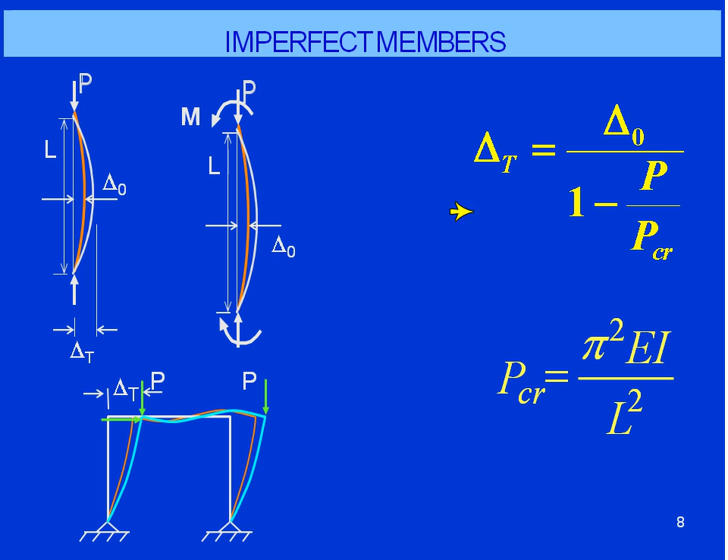In all these instances, this formula will give an accurate indication of what the displacement is after you apply some axial load. We sometimes call this term an amplification factor - you take an initial displacement, and as you apply axial load, the displacement increases. This is a really important concept in stability, because it says that as the load P approaches the theoretical buckling load, the deflections will go to infinity. That means there will be plenty of warning prior to an impending problem.

In fact, what this graph shows is that the Euler load, which is up at this level, is really never reached, because we're going to start to get some yielding due to the second order effects generated by the P-delta moment. In this case, it's located right here at about 85% of the Euler load.

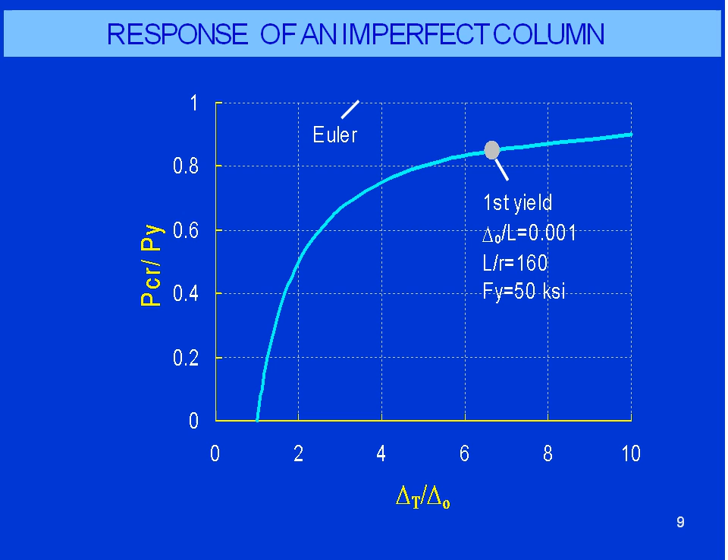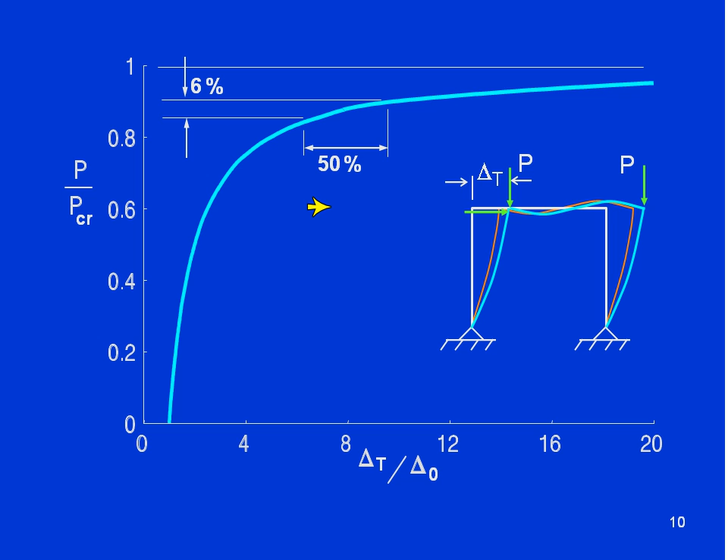Now, a very small increase in load as you get close to the buckling load has a very significant change in deflection. In this frame, if we're at this level, a 6% increase in the load, going from about 0.85 to 0.9, will increase the deflection about 50%. That means when you are getting close to any instability in a frame structure, there should be ample warning that impending disaster is about to occur.

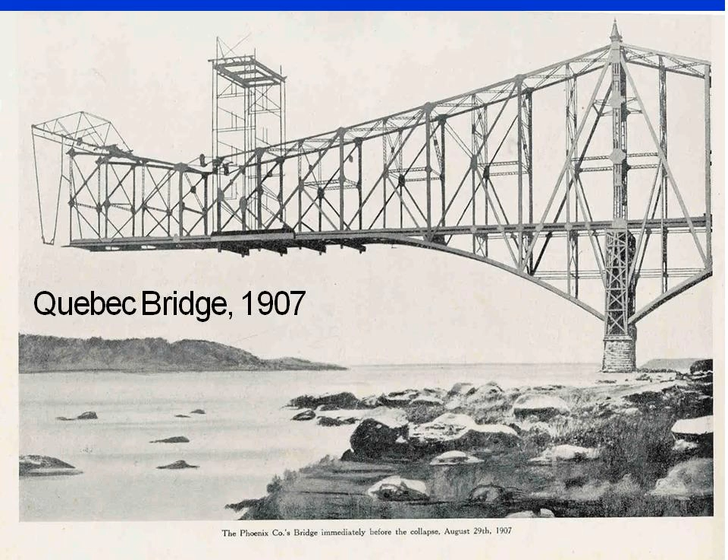I'm going to read some quotes from a magazine article by Tarkov, referenced in the PDF file. This is what happened to the bridge. On August 6, McClure reported to the bridge designer, Cooper, that the lower chords of the south cantilever arm were bent. Cooper was troubled - he wired back with the almost plaintive question, 'How did bend occur in both chords?' Chief Engineer Deans insisted that the member had already been bent when they left the shop.

This is a typical situation in which fabrication and construction now start arguing as to what really happened. McClure insisted that they only began to show deflection after being installed on the bridge. The debate over the chords occupied the greater part of August. Meanwhile, work continued and the stresses on the lower chords grew.

Two weeks later, three other chords showed distortion. The bridge was collapsing with glacial slowness, but no one, not even Cooper, appreciated fully what was happening. After another week passed, the crisis should have been obvious to all. A week before, chord 9 of the south anchor arm had been only three-quarters of an inch out of line. Now the deflection was two and a quarter inches.

McClure wrote to Cooper immediately. After Cooper read the letter, two days later he sent a terse telegram to Phoenixville that read: add no more load to the bridge till after due consideration of facts. I will be over at 5 o'clock.

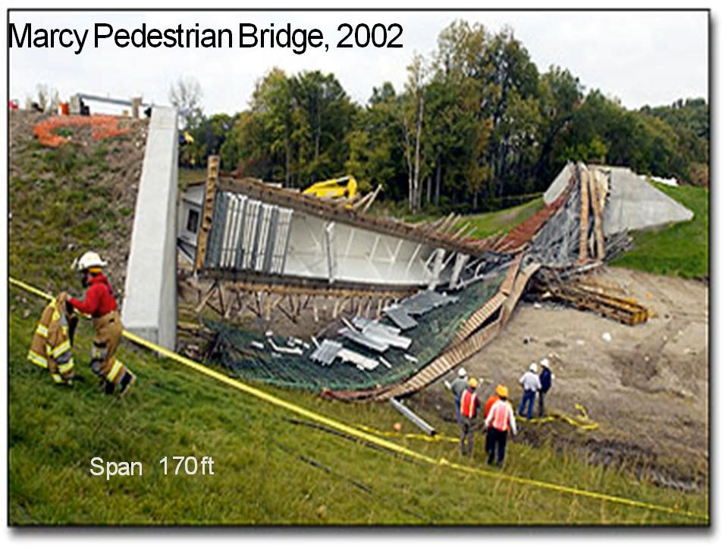The little frame cannot sway, so we would call it a braced frame. You could read papers or do analysis which suggests that for a frame like this, you might be able to use K factors less than 1. In this case, it would calculate out to 0.84. So perhaps you think you can put on a load equivalent to about 40% higher than the Euler load.

I'm going to define an M sub O, which is just WL squared over 8, the simply supported beam concept. There is a moment connection up at the top, so the gravity load on the beam is causing some moments. The distribution shown here would be a distribution we would typically get from a first order, normal structural analysis. There's a moment at the joint, there's a moment in the beam, and there's a maximum moment in the column, which at this stage is shown at the end.

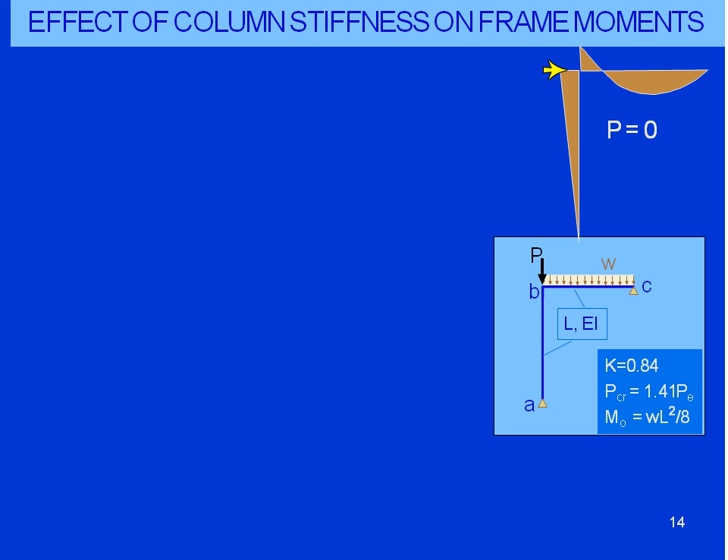This curve is the maximum moment near the midspan of the beam. If we just follow it, we can see that as I apply axial load, the maximum moment in the middle of the beam increases. As a matter of fact, when the axial load reaches the Euler load, pi squared EI over L squared, the maximum moment in that beam is 1/8 WL squared. In a problem like this, many engineers probably would even just design the beam to carry 1/8 WL squared and not actually take advantage of the restraint they thought was available at the end.

The moment at location B, which is at the top of the column, starts off at about half of 1/8 WL squared, but it reduces as the axial load increases, and in fact reaches zero at the Euler load. What has happened is the inflection point, which was maybe at about the quarter point in the beam, has shifted as axial load occurs, and at Euler load the inflection point is right at the top of the column, and the moment is 0.

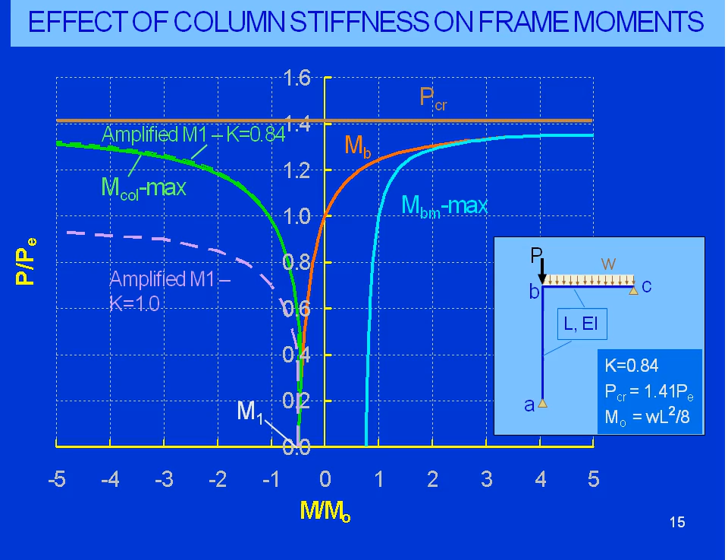We're going to look at this more carefully with regard to a moment diagram, which shows how the stiffness is reduced in the column, and what that does is change the moment distribution within the column.

This is for P equals 0. When we're halfway up to the Euler load in the column, in all these cases the load on the beam has been held constant. We can see that the inflection point has shifted, and the shape of the moment diagram in the column is changing from linear to some curvature.

At the Euler load, we actually appear to have a pinned end in spite of the fact that we have a moment connection up there - the moment is 0. Then as I attempt to put on higher axial load, in this case 10% above the Euler load, the inflection point is actually moved within the beam, if the beam has the capacity to support this. Usually it would not, so a plastic hinge would form in the middle, and we really could not get a value above Euler.

So papers are published that suggest you could take advantage of the restraint that a beam provides to produce K-factors less than 1, but in a frame structure where the beams are carrying load, that's just not going to happen because the beams have not been designed for the amplified moment - notice about a 50% increase in moment - to support a load higher than the Euler load. Now in truss-type structures where there is no load on the beams between the ends, K-factors less than 1 are a possibility, but not in a frame structure.

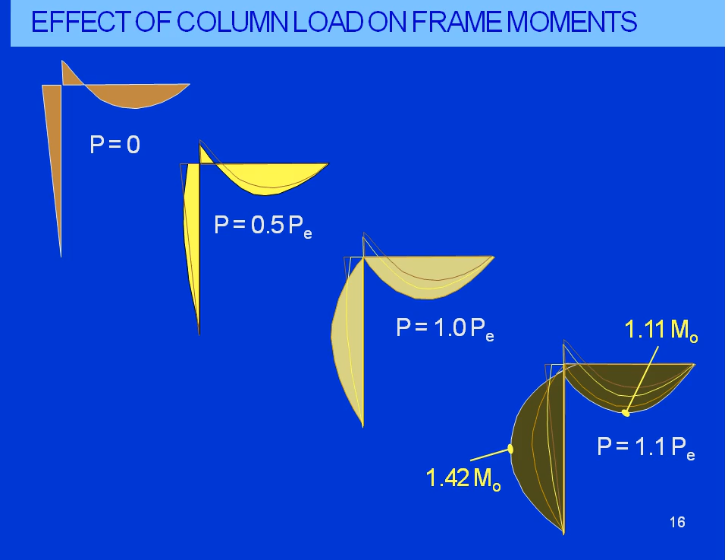Now we're going to shift to the second concept, which is understanding and taking advantage of inelastic column behavior.

Again, we're going to look at imperfect columns. I'm going to look at the first yield stress of P over A plus MC over I. In an imperfect column, the moment will be equal to P times delta total given by the formula we discussed in the first portion.

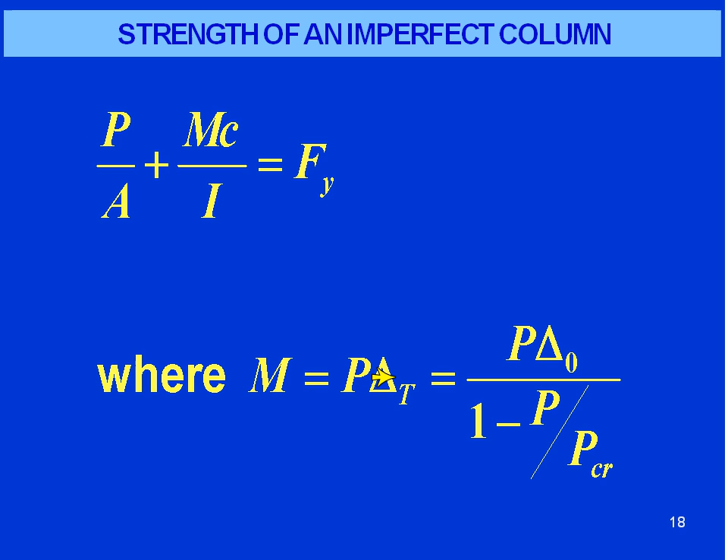Now, a plot of P with different L over R's for first yielding using just P over A plus MC over I produces this solid line. If I choose an initial imperfection of 1 in 1,000, and our cross-section has a span to depth ratio of 20, and in this case I'm dealing with yield point of 50, just plugging in the classic strength of materials equation, you get a curve that looks very much like the column curve, shown dashed in this case.

In the low load or slenderness region, the formula does a pretty good job. In the shorter region or high stress level region, that formula overestimates the capacity of the column. Generally, if you take P over A plus MC over I, and you have that reach yield, you are very close to the maximum load that a compression member can carry. In this case, that would estimate the capacity.

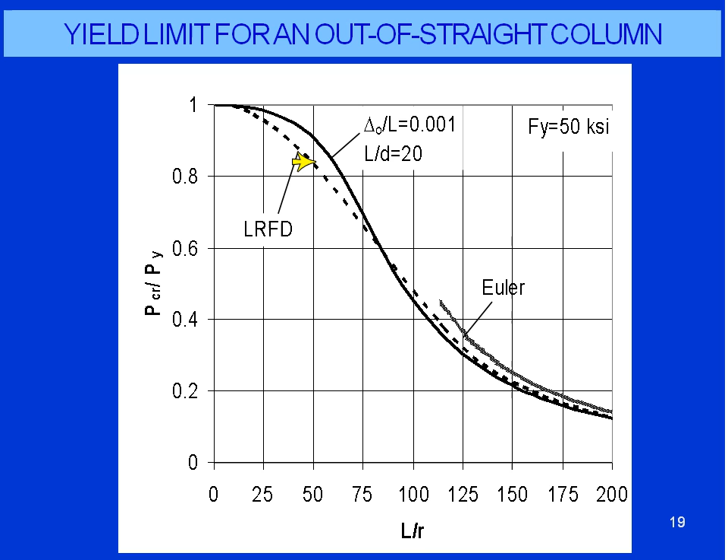There's less capacity by the current spec, and that's because of the presence of residual stresses. When you buy a rolled section, there are already stresses in it, like it or not, and that's due to differential cooling during the manufacturing process.

The concept of residual stresses is usually explained by a series of pictures like this. This might be a residual stress distribution, which shows compression at the top, the tips, and then tension stresses near the junction of the web and the flange.

There are many distributions. When I now take a P over A applied stress, those stresses are superimposed on the existing residual stresses to produce a stress distribution that varies over the cross-section. In this particular case, it's shown that the tips have already yielded, but the junction near the web - the average applied stress - is not at yield yet, but because of the presence of residual stresses, some portions have yielded.

Now, we know from the stress-strain curve that when portions of the steel are in the yield zone, there is no stiffness. That is, E is not 29,000, but E is 0. That's illustrated by the yellow portions of the cross-section. The green portions are still elastic.

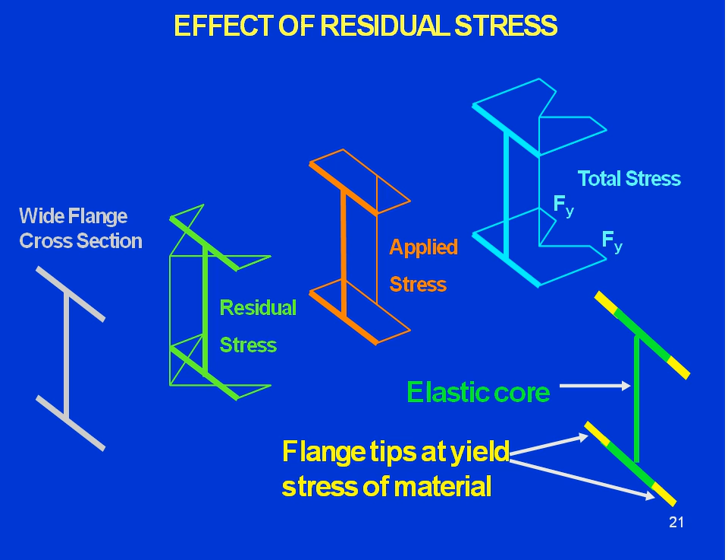Now, this concept, so what? We use the column curve, and yeah, that seems to make sense. But to look at this further, we'll have some practical significance. Also, that concept that there are portions of my cross-section that are useless as far as stiffness is concerned is a little bit hard to swallow. So we're going to do an experiment here.

We have a cross-section. The green portion has been manufactured using high-strength steel with a proportional limit about 70 KSI. We've epoxied two pieces of low-strength steel that have a yield point of about 40 KSI. These are the stress-strain curves that were measured.

Now, in the low stress range on the cross-section, both of these pieces are elastic, and the modulus is 29,000 for the entire cross-section. But if I get stresses on that cross-section that are higher, then the brown portions will in fact be yielded, and that means that as far as stiffness is concerned, they contribute nothing if the structure wants to deflect, or in fact we call that buckling.

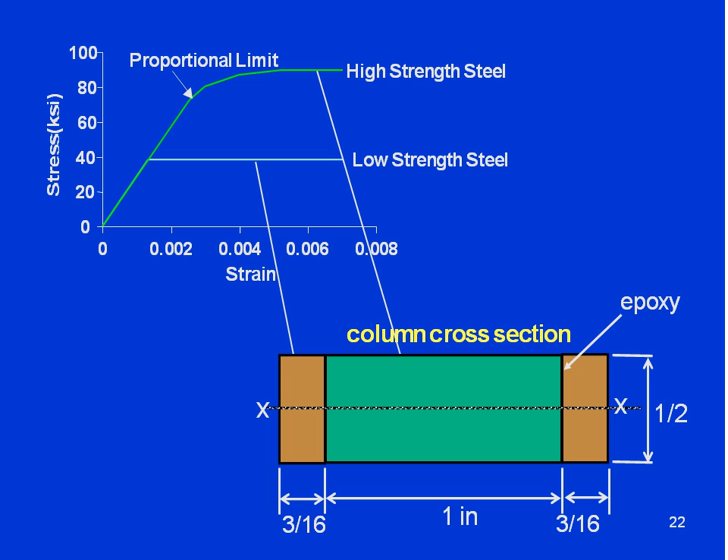So we did a test on these. We tested the cross-section that's just the center portion by itself, and we tested this built-up section made up of two materials. But the buckling is going to occur about the weak axis, so the area that's added here in fact adds directly to the moment of inertia. In this case, the moment of inertia is 38% bigger for this cross-section than this one, if in fact all the portions of the cross-section contribute to stiffness.

So when we tested a long member that would be expected to buckle at stresses lower than 40 KSI, this member carried 38% or 40% higher load than this one, as we would expect.

But when we tested a shorter one, it permitted higher load or higher stresses. At those higher stresses, the brown portions have yielded. And the experimental test load for both this cross-section and this one gave exactly the same load when the length was short.

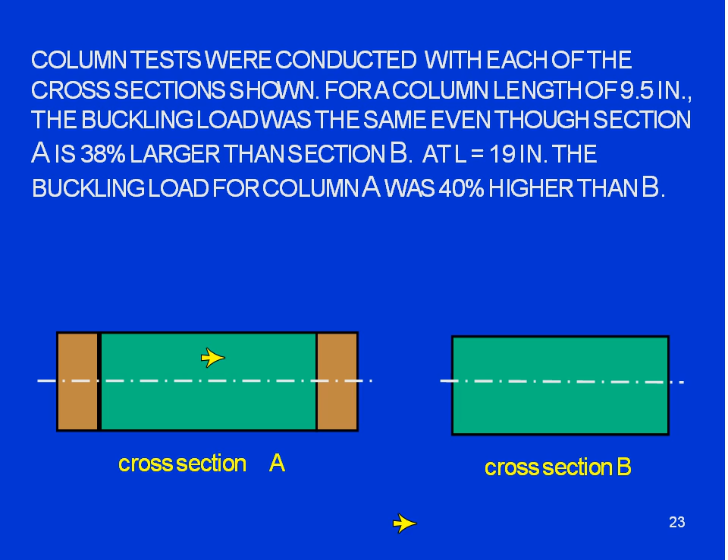Any yielded portion of a steel column contributes nothing to the buckling strength of that member, even though the entire cross-section supports the load.

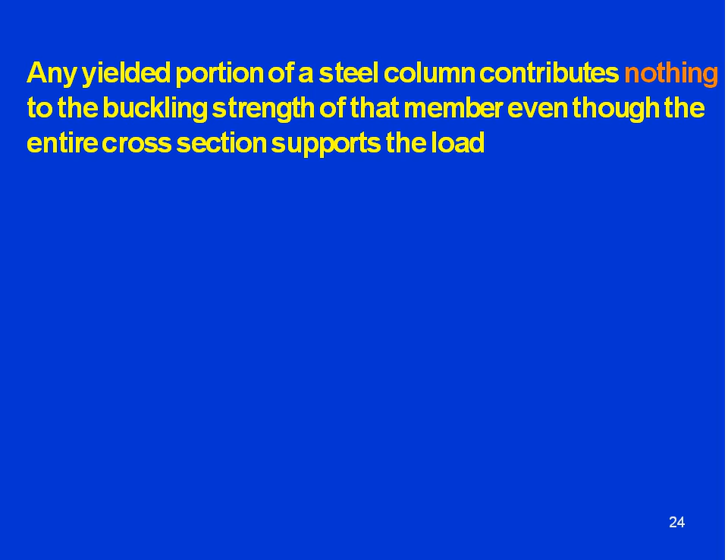Now we're going to utilize that concept by looking at the column curve compared to the Euler curve and try to understand inelastic behavior a little better. We have a tendency to think that the elastic range of column behavior is the high slenderness area, and the low slenderness area is inelastic. The low slenderness area we sometimes call the inelastic range, but actually that's not a good way to look at the problem. Inelasticity is caused only by load, not how big the cross-section is.

If I have a big cross-section with a small load, the cross-section is elastic and it's very stiff. It's only when I exceed, by the AISC column curve with P factors, a P over the yield load—this is the squash load—of 0.35, will I start introducing inelastic concepts. That is, the Euler curve and our current column curve do not line up, whereas they do line up when we have stresses below 0.35.

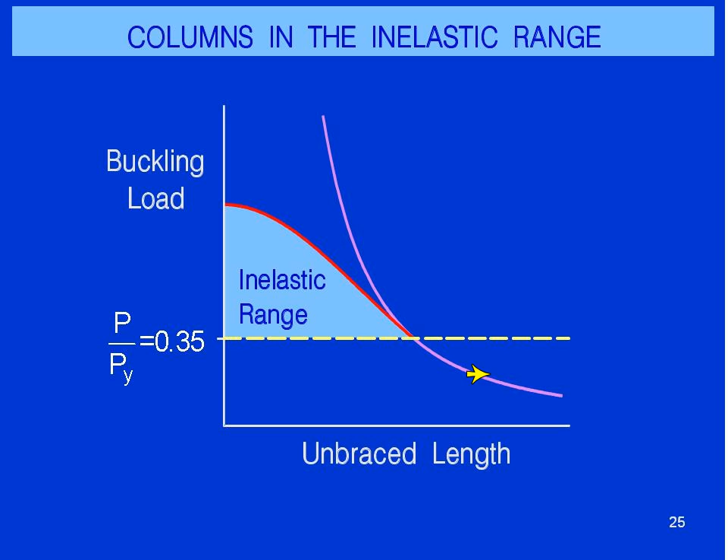Now we're going to use this idea because I like Euler. I'm going to look at this column curve and say, if I took the ratio of our current column curve to what Euler would say we would carry, of course, in the inelastic range, there's a difference.

There's a reduction, and we're going to call this a stiffness reduction factor, tau. Mathematically, that's equivalent to what we call the tangent modulus over the elastic modulus, but it's just as easy to visualize it as the ratio of these two points. What this says is the cross-section is losing stiffness. It's not 29,000 anymore, it's effectively something less.

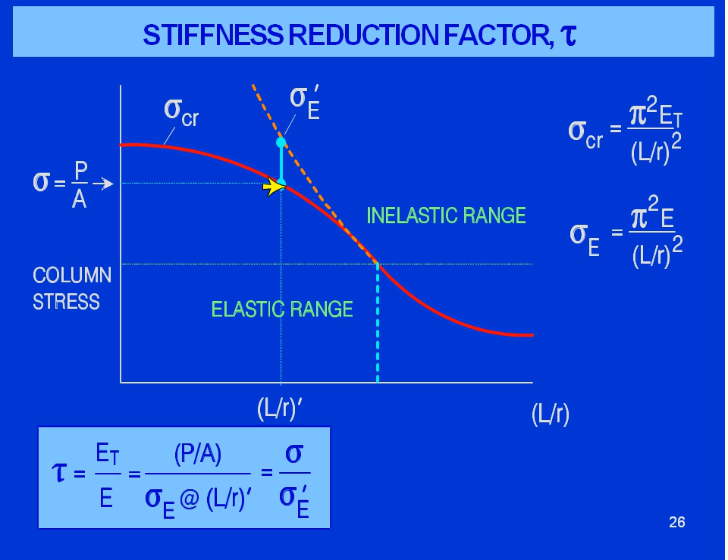I'm going to introduce you to a little bit different way of looking at column design by utilizing that tau factor, and I'm going to illustrate it just with a simple column design first. This is the current method in the AISC specification. There are two formulas, the Euler type, reduced by 0.877, and then what we call the inelastic type.

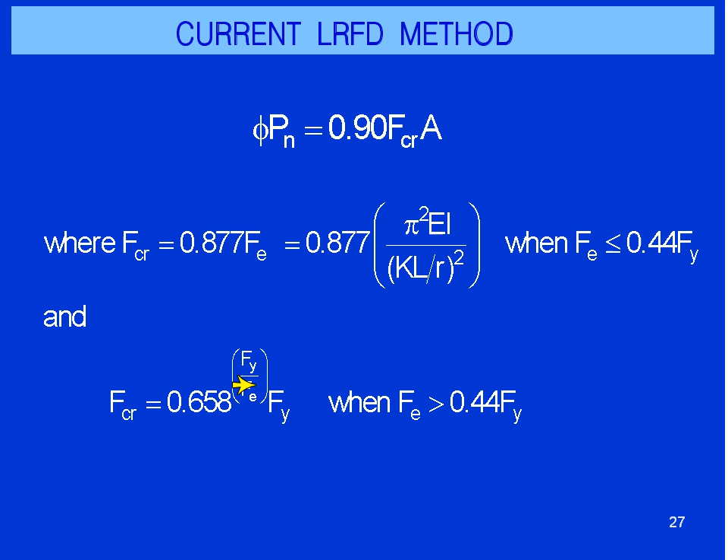Now I'm going to introduce something that's equivalent. I like that Euler equation, and I'm going to put in the phi factor of 0.9, and then this is just the Euler equation, but I'm going to put in a tau. I'm going to take that AISC equation, divide it by the Euler equation, and come up with a new formula.

It's this one here. Now, it's 1 if the load divided by the squash load is less than 0.35, because that means the cross-section has low stresses and it's elastic. If my axial load is higher than 0.35, I'll plug into this formula, and it will tell me how much my stiffness has been reduced.

Now, this times pi squared times E is 226,000 times the moment of inertia divided by L times tau. This is the column stiffness formula.

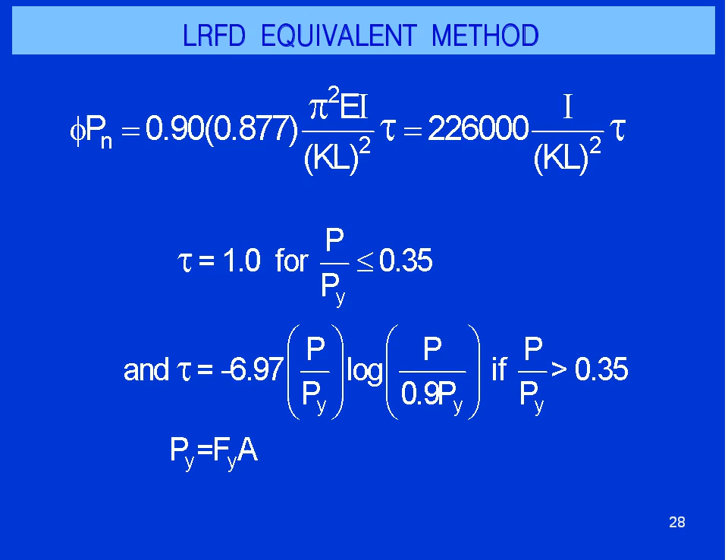I'm just going to do a little column design. I'm going to take a column that has a load on it of 1,030 kips, and it has got a length of 20 feet. It's pinned end at both ends. And what column size is required?

Well, of course, if you have an AISC manual handy, what you will do is just enter the column tables with a length of 20 and that particular load, and you would find, if it's a W12 section, that a W12 by 120 will work. Now, that's the easy way, but I want to introduce you to this new way of looking at it because that's going to be important for some other examples I'm going to show.

Using this newer idea, I'm going to first calculate. It's always a good idea to know how much load you have on there compared to the yield load, and in this case, I'm going to try this column. It says that with this load of 1030 on here, my P over Py is 0.584, which is greater than 0.35, and when I plug into that

stiffness reduction factor, which, by the way, is published in a table in the 13th edition manual. The new manual has a slightly different formula, but I won't get into that. What this says is the tau comes out to be 0.764, which is saying that with a load of 1,030 kips, there's some inelasticity on that cross-section which reduces its stiffness by almost 25%.

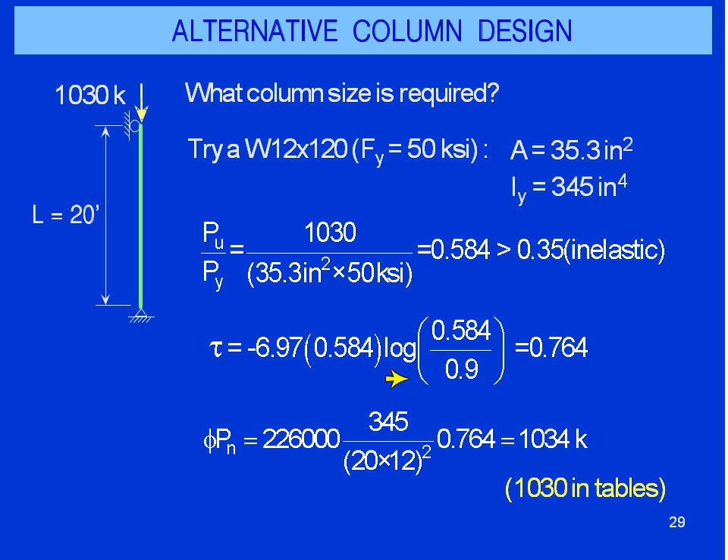Now, for this problem, you wouldn't apply this approach because it's easier to use the column table. But that concept is going to be useful in this next concept, which is called the summation of P concept for system buckling. Everything we've done up until this point has been for an individual member. Now we're going to look at systems, more than one member.

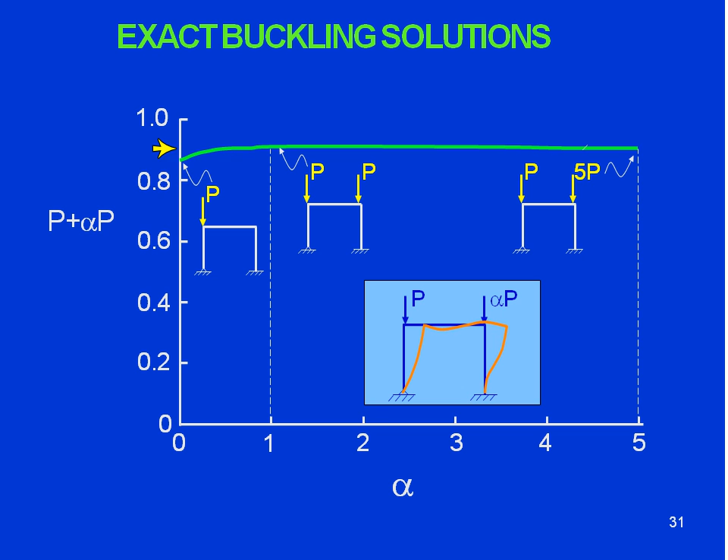Now we're going to look at a couple of examples here, one of which is going to be elastic.

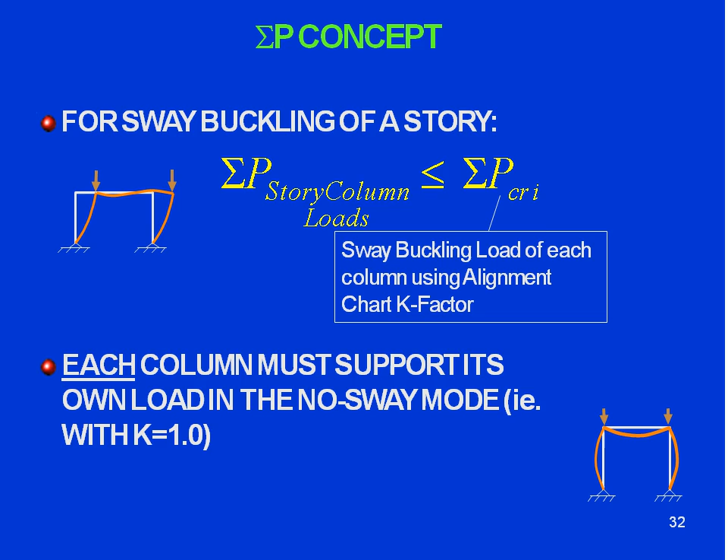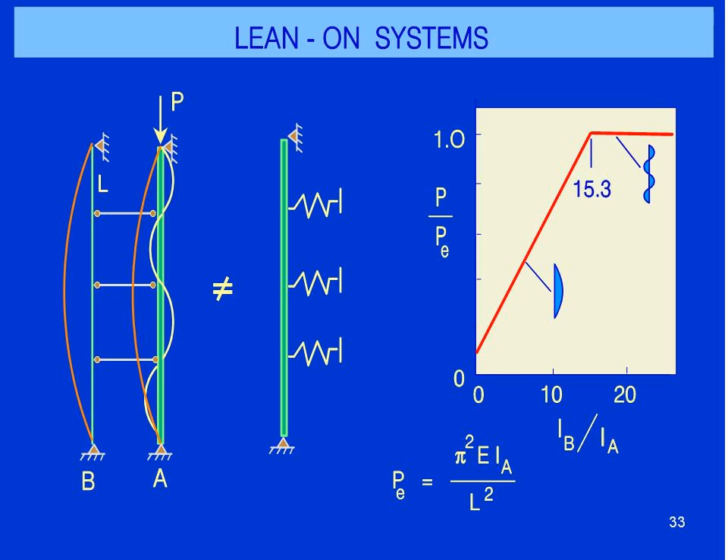Now we're going to see if we can predict this behavior using the summation of P concept. In this case, we have the same situation — I've got member A, member B. I want to control the sway buckling load to a level equivalent to buckling between the ends.

In other words, I want to get this sway stiffness stiff enough to let column A buckle between the links. That buckling load is pi squared EI sub A over L squared, so this is the load I want to reach. The resistance of the two columns in the sway mode is given by pi squared E times the moment of inertia of member A, divided by 4L, that's the length, and similarly for moment of inertia B — notice there's an A on both sides of the equation. I can solve for the moment of inertia of B, and it comes out to be 15 times the moment of inertia of A.

Wow, that's pretty close to the 15.3. But you say, well, what a waste.

I'm going to just choose a moment of inertia of this member and forget about this one completely. Well, what moment of inertia would you need? You would need a moment of inertia of 16 times pi squared EI over L squared, because to reach that load, it's 16 times higher than this. So in this system, I can put 16I in this column, and then I don't even need this. I can put 1I here, and then I need 15 here. I could put 8 here and 8 here.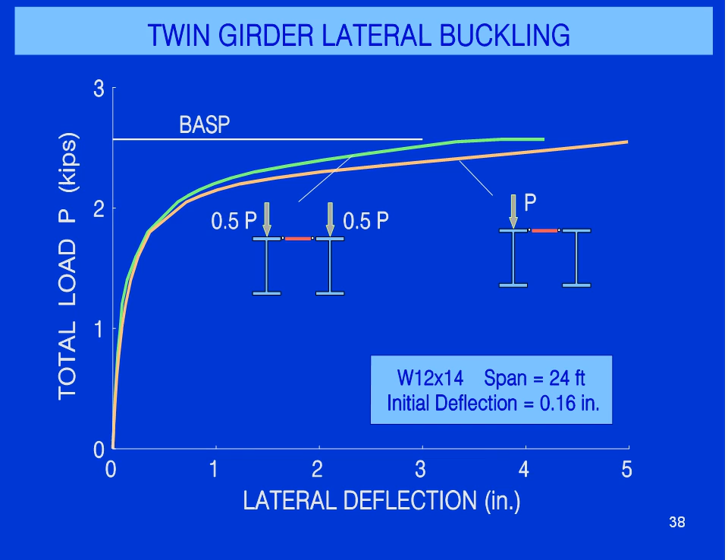We're now getting close to the second-to-last concept here, and we're going to have a complete change in direction by looking at the effect of end connection details in built-up columns.

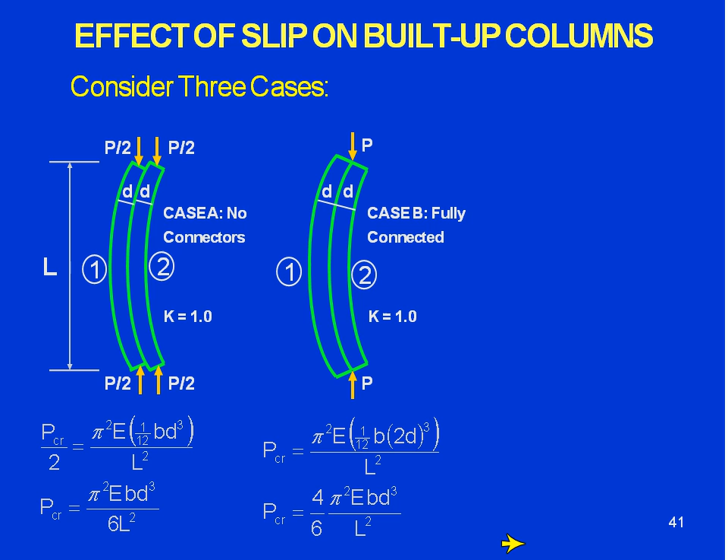Wow, that is hard to believe, that I just attach the end and in this particular case I get the same capacity? Yes. But if I separate these two members and tie them together, the moment of inertia starts increasing by the distance between them, so the capacity would increase as I separate. In this case, though, if I did that, I would have no change. It's interesting that for this particular case you get exactly the same load.

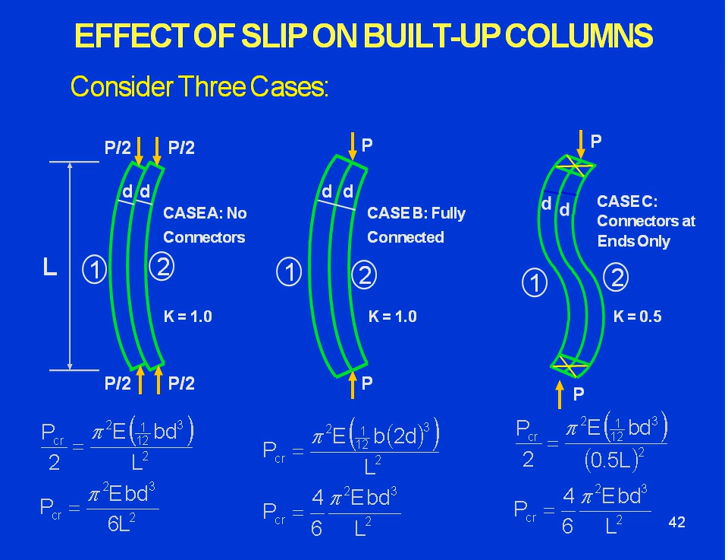Now, that's a little bit hard to believe. So we're going to look at a video here.

I'm going to now show you some test results on a more practical kind of problem. In this case, we're going to take a couple of angles, 5 by 3 by 1/4, long legs back to back. The length's going to be 150 inches, which is in the elastic buckling range. We're going to vary the conditions at the end and the use of intermediate fasteners connecting these two, and load this up to buckling.

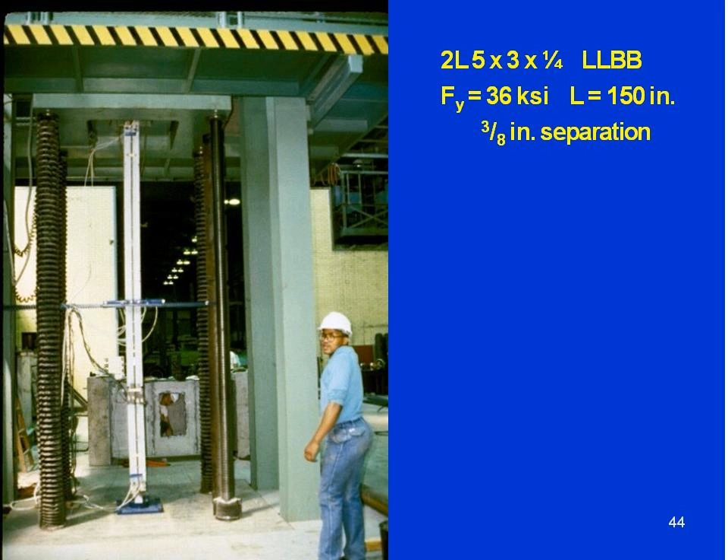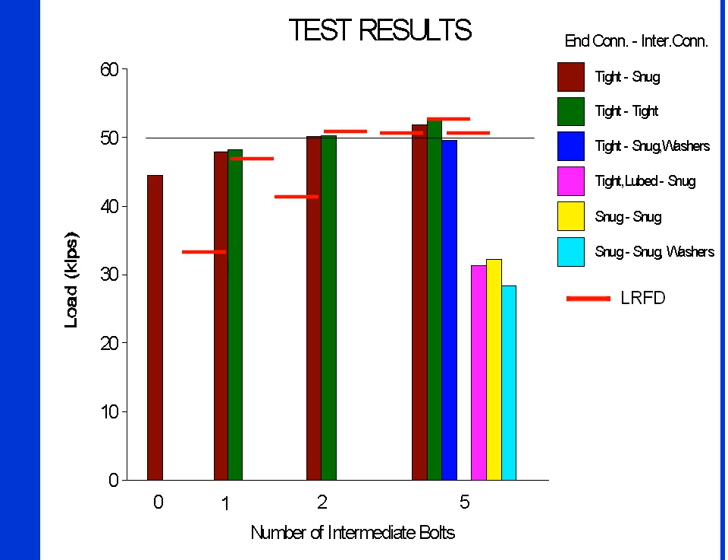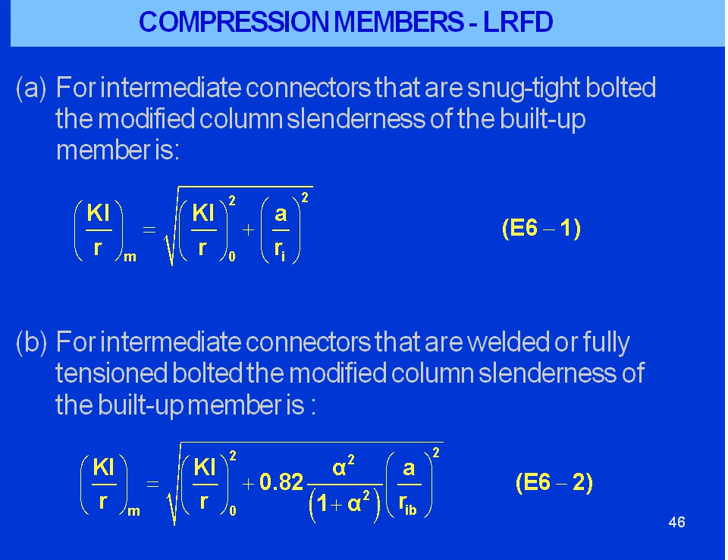Now, the AISC equations here, I'm not going to bother you with those, but I do want to close this section with a very practical application of this concept to my extension ladder that I have at home.

So one of the benefits of this seminar is you can increase the stiffness of your ladder. If you ever had the opportunity to put it on a couple of horses, you would find out that this direction is the weak direction, and the strong direction is toward the house.

So when you climb the ladder and shake it a little bit, you'll find that it's not very stiff. But by putting these two plates at the end, tying them to the rails, the stiffness is increased about 4 times. So when I climb my ladder, it's very stiff in the apparent strong direction, but in reality, weak direction.

Now, the last topic deals with stiffness and strength required for braces. There'll just be a couple of slides here, and then we'll look at a video of an experiment.

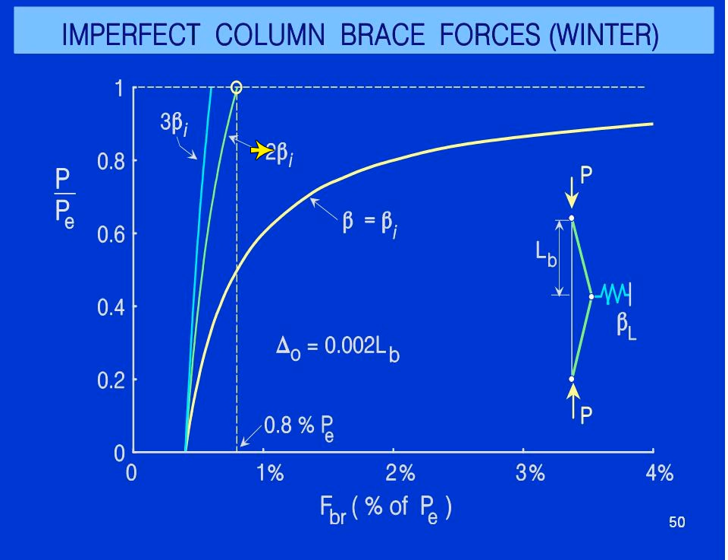And so in the AISC specification, in order to reach the Euler load, I'm going to need a brace stiffness that's greater than the ideal value. In the AISC specification, we use 2. So as a simple rule, you have to use brace system stiffness at least twice the ideal value.

The brace force is directly related to the magnitude of the initial out of straightness, and you need to design the brace and its connections for 1% of the compressive force if the initial out of straightness is 1 in 500, which is the basis of the AISC specification.

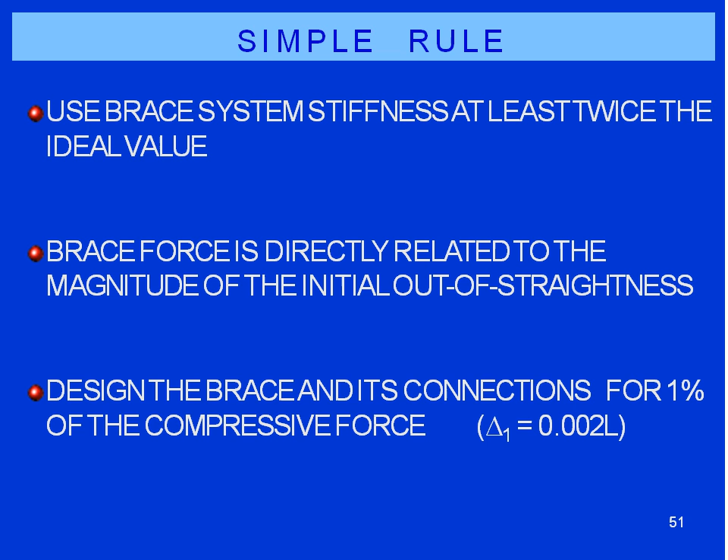We're now going to look at a video illustrating the stiffness and strength.

Okay, well, we've covered 5 different stability principles. I hope this has increased your possibilities for innovative and efficient steel design. Thank you.

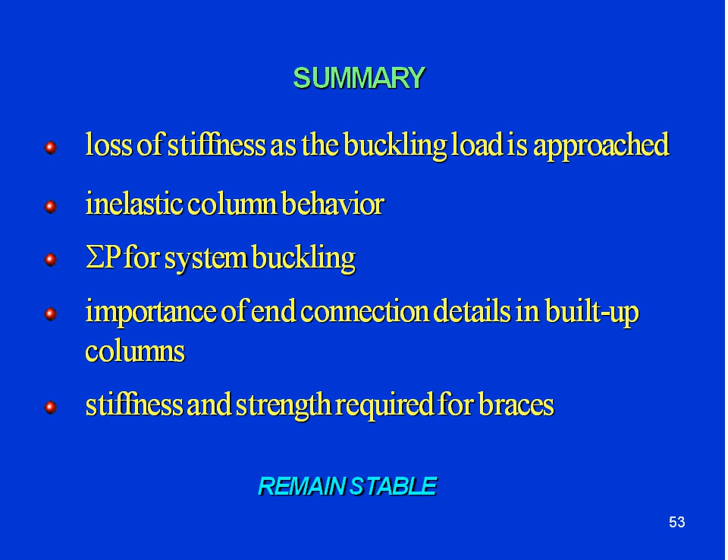The first question, I want to go back to slide 36. The question is, for the sum of P method, what happens if column B is in tension? Can we increase the load on column A?

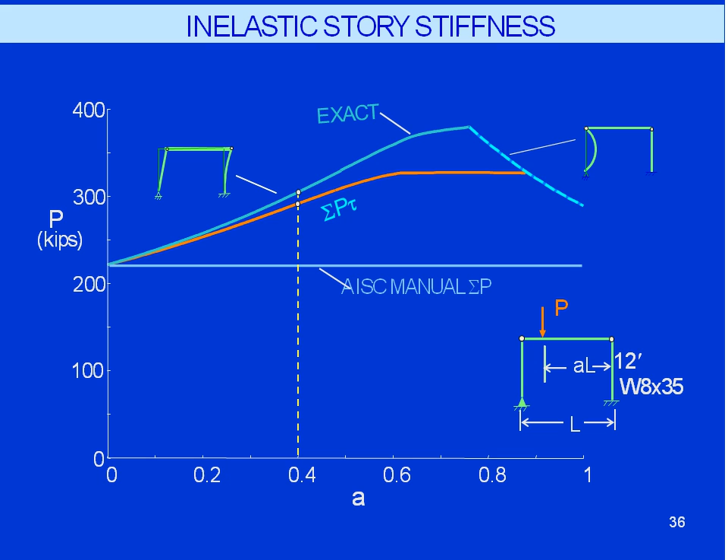Are you showing slide 36 or 35? I think the question must be related to 35. Yes, I'm sorry. Okay, so repeat the question, please. So the question is, for the sum of P method, what happens if column B is in tension? Can you increase the load on column A then?

The answer is yes, because you have an increase in the stiffness of your system with B. That is, the stiffness of a system under compression decreases, but the stiffness of a system under tension increases. If you try to put lateral load on a system with tension, it will deflect less than if you apply lateral load to a member that has compression in it.

So therefore, tension improves the stiffness, compression decreases the stiffness. Okay, this next question, there's a little bit of a narrative to it.

Say we're talking about a typical aircraft hangar roof where you've got identical trusses spanning across the building. The roof is a standing seam deck, and so the diaphragm is created with diagonal steel framing at the truss compression chord. The AISC manual is very clear on how to design each panel of the diaphragm as a relative bracing system, but there isn't anything on checking global buckling to say that every truss is in a sway mode. Is the global buckling mode inherently prevented when you address local buckling in each panel?

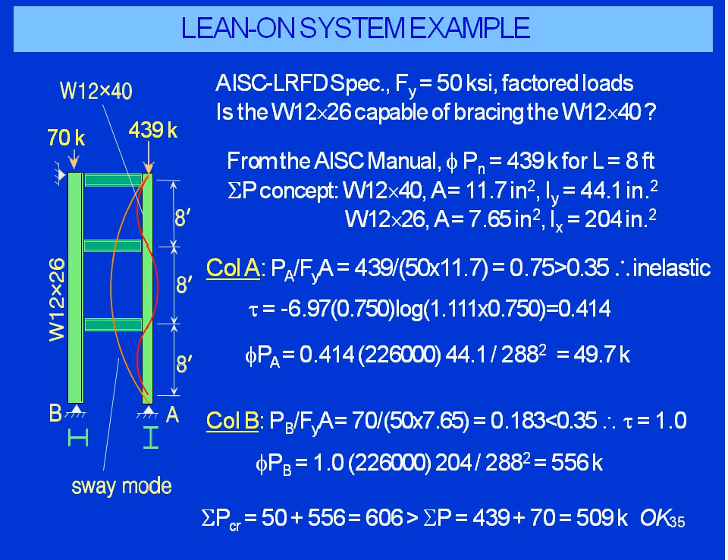This next question, I believe, is in relationship to the last concept on stiffness and strength required for braces. The question is: the model considered for evaluating the required brace stiffness has a hinge at the brace point. In reality, the member is continuous over the brace point. Due to this, is there any reduction in stiffness?

I guess I don't fully understand what's meant by reduction in stiffness. Yes, the column is continuous from one end to the other, much like any kind of column. And if I place a brace in the shape that the buckle goes into, there's actually an inflection point right in the center.

So even though the member is continuous, the moment is basically close to zero. When you include initial imperfections, there is a little bit greater force introduced because of the continuity. That's why ideally with a real hinge, the brace force requirement was 0.8%, but computer solutions would show that you needed about 1%. Maybe that gets to the question, but I believe I don't fully understand what is meant by the reduction in stiffness. I will try to follow up with this individual afterwards.